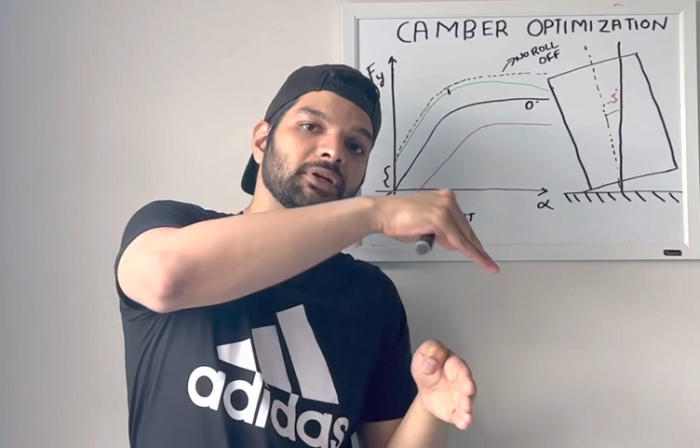So for example, consider this wheel to be a left wheel on a car which is inclined negatively 5 degrees in this direction. Now when this car is making a right turn, because of the weight shift, the force will be transferred on this wheel. Therefore this negative camber will help in moving this wheel completely vertical, and we'll have more tread on the road, which will help us gain more grip and therefore more lateral force when we are turning, which is very essential, right? But it's not practical to just give any random number of negative camber value.

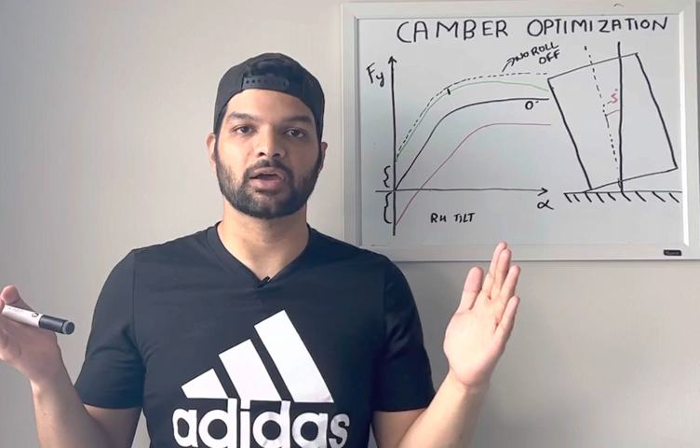If negative camber helps us in making a hard turn, then the question arises, why don't we give like minus 50 degrees of negative camber, right? And therefore we can do harder turns and we'll have more tread laying on the road when the weight transfer happens, and that will be helpful in cornering, right? But no, it doesn't happen like that.

Obviously there are many reasons which we have discussed in other videos for side effects of the camber angle, but in this video we are going to be talking about the camber optimization topic. Minus 50 degrees was an exaggeration, but for example, if we go from minus 5 degrees to minus 15 degrees, just taking as an example, then a pattern has been noticed.

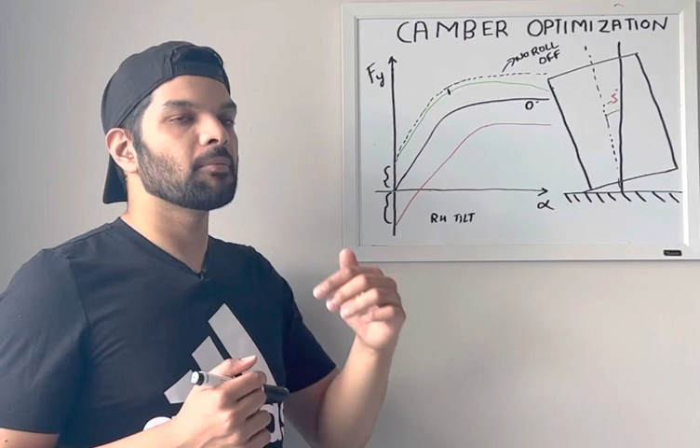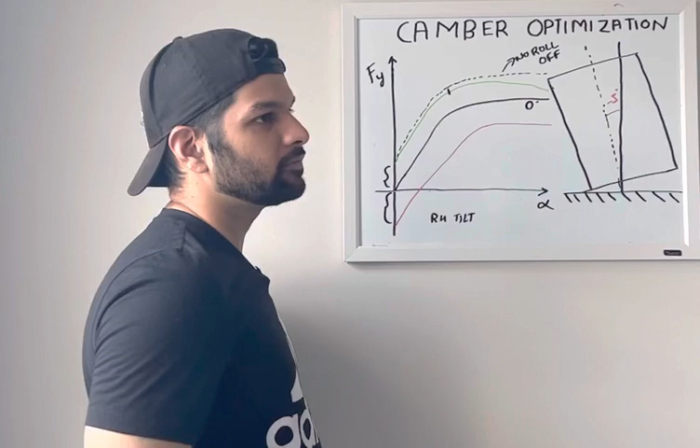If we see in this cornering graph, which is lateral force versus slip angle, you see this black line. This is the graph of lateral force versus slip angle when we have 0 degrees of camber, when the tire is perfectly straight. And then for this wheel, when we have negative camber, and this is the outside wheel, the left wheel on a car making a right hand turn, the weight is shifting on this wheel and this tire gets itself vertical and has the perfect tread on the road.

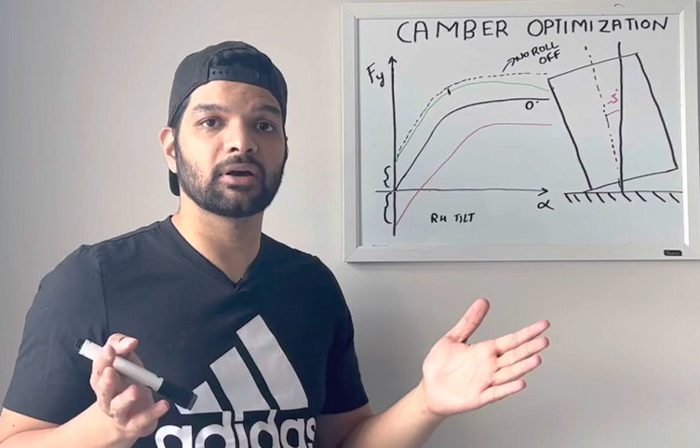In that case, we'll have the green graph, which starts from a higher position, and then after the linear range, the lateral force value starts to drop off for the higher slip angles. So this is one of the reasons why we need to optimize our camber angle, what negative camber angle we want in our car, because we don't want to lose grip, and we want to make sure, with all the weight of the vehicle and the other suspension characteristics we will discuss in later videos, how much lateral force we will need to make a turn for whatever application of the car at this speed. So this is one of the factors that need to be considered.

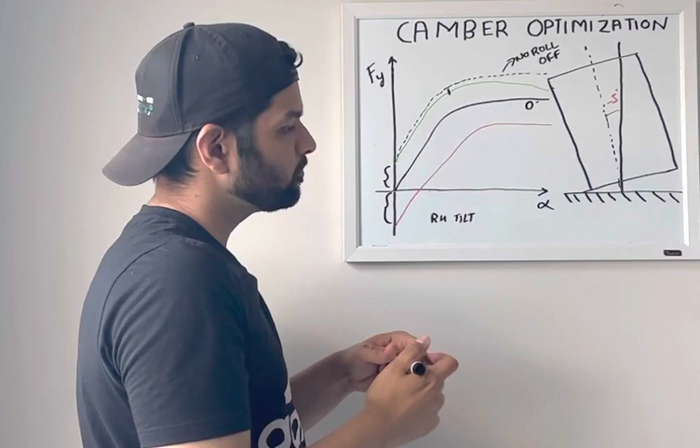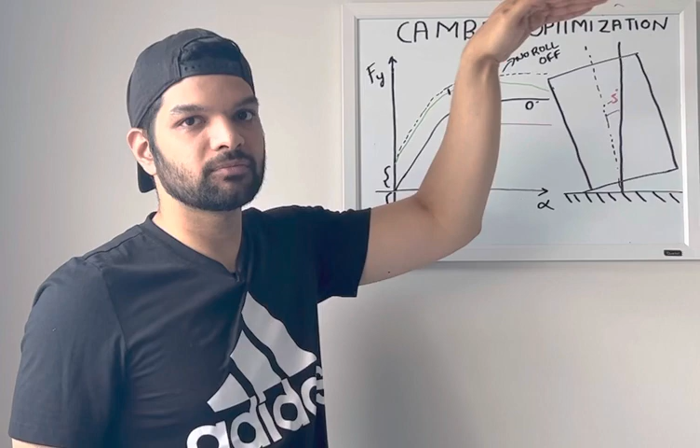However, also look at this dotted black line. This tells us that if we had negative camber, like this wheel, but there was no roll off, lateral force would still be higher at higher slip angles compared to the wheel at 0 degrees of camber. But in practical life, what happens is the green graph: after the linear range, the lateral force value starts to drop off, unlike the 0 degree. Even for the 0 degree camber angle, the value doesn't keep on increasing, it drops off, but not as much as for the camber angles.

The red graph is for the other wheel, the right hand wheel. If this is the right hand wheel and it's inclined negatively, negative 5 degrees, and we are making a right hand turn, then the weight will be shifted on the left wheel, and this one will go further, it might go to minus 6 or minus 7 degrees. So then we'll have less tread lying on the road, and therefore less tendency to generate lateral force. So this graph represents the lateral force for the right hand wheel, right?

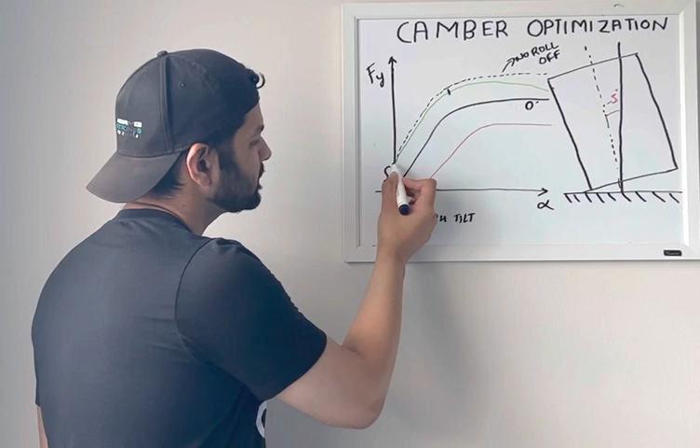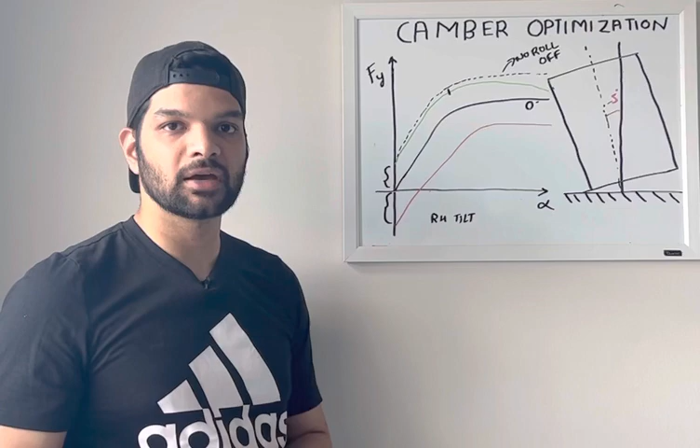But the question arises, why do the graphs start from over here? Okay, negative camber helps in generating more lateral force, but that should mean it should start from 0 and have a steeper curve, right? No, this is because of camber thrust, which we have studied already. With negative camber, camber thrust helps in generating additional lateral force, which helps in cornering. So that's why we have this amount of force even at 0 degrees of slip angle. Even when we are not turning, the wheel has a tendency to provide force in that particular direction. So that's why we have two graphs like this.